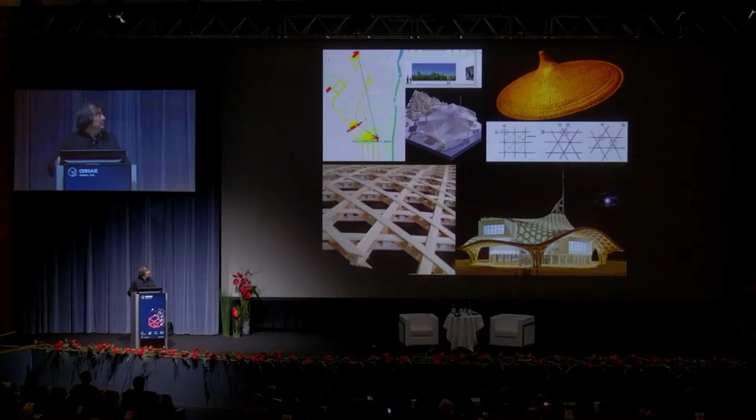This is a map of the city. This is the train station, and our site was the south part of the train station, which was totally empty. The center of the city was the north part, with a very famous cathedral.

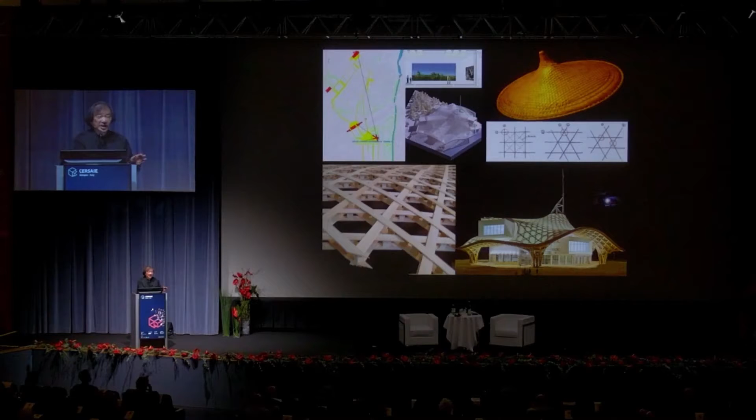This is the model I submitted. There are 3 so-called gallery tubes, 15 meters wide and 90 meters long, stacking on top of each other.

At each end of the gallery there is a big window called a picture window, framing a view. For example, the top of the tube frames the very important cathedral, and the second tube frames the train station.

Because the city of Metz is on the east side, near Germany, after the war the city was always occupied by Germans. There are so many important historical German buildings, including this train station, so the second tube frames it as part of the history.

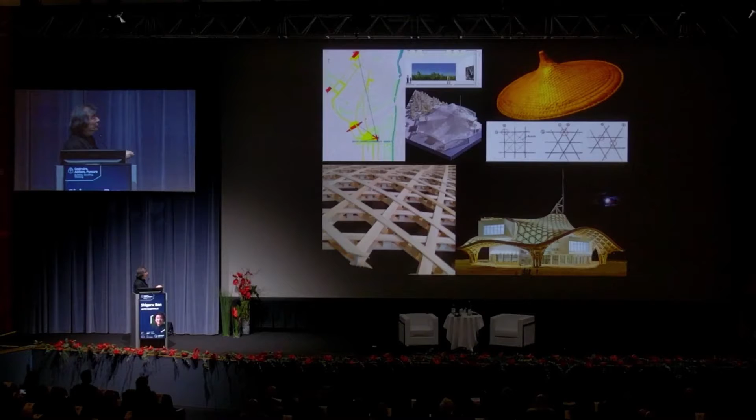The roof idea comes from the traditional Chinese bamboo hat. When I had to decide the geometry to make this structure, I studied 3 ways.

For example, if I divide with a square, because a square changes shape, we need bracing, and the connection becomes very complicated.

If I divide by triangle, it's the most stable shape with no bracing, but there are always 3 elements meeting at the connections. The third option is hexagon, which came from the bamboo hat.

As you see, the hexagon doesn't have in-plane stiffness, but because of the triangle, without any bracing this is a very stable shape. Also, at each connection you can see only 2 elements meeting, so the joint is very simple.

So this is a model. And because this is a tensile structure, I overlapped each element in order to avoid complicated connections.

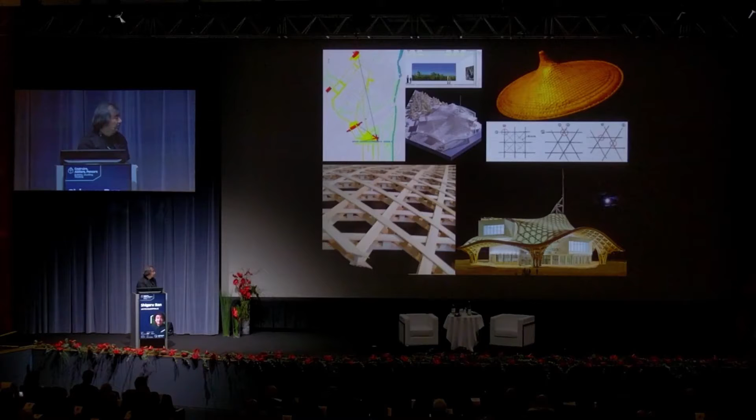Next, please. This is the completion. Just before the opening hour, the glass shutter is closed and people are waiting outside.

This is a picture window. Next, please. Next, please. So you can see this is a picture window.

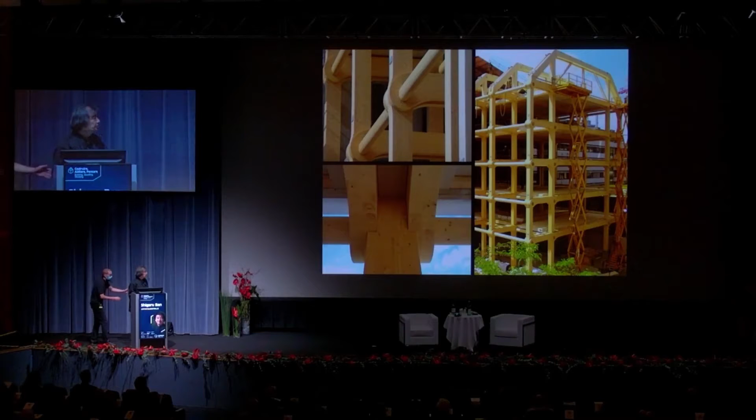Next, please. Thank you, yes, thank you. So all the structure is exposed. As you see, there are no metal connections. The glass shutter opens to create a semi-outdoor in-between space.

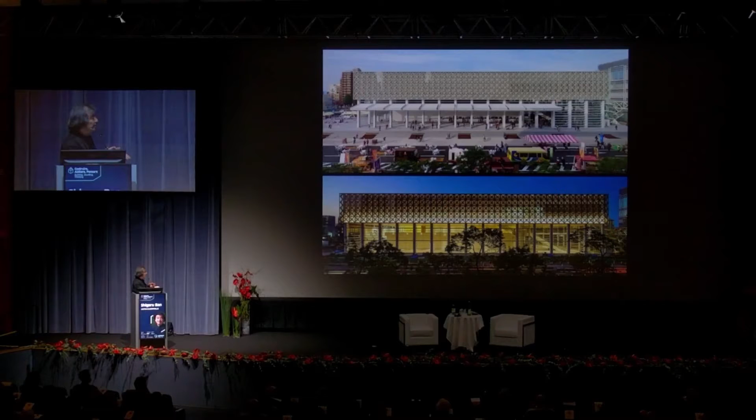Next, please. This is a museum in south Japan, and this area is very famous for bamboo craft. So I designed the upper floor structure like woven timber, and the main facade is made of glass bifolding doors. I wanted to make a museum open to the street, to connect inside and outside.

Everybody can come in from anywhere. In good weather, we don't have to depend on the air conditioning.

Next, please. So this is when the bifolding doors are open. There's another lobby on the 4th floor with a pattern of woven wooden structure like a bamboo hat.

Next, please. This is La Seine Musicale near Paris. This is an island on the Seine, used to be a Renault factory until the 90s, and the factory moved out.

The first project was the Pinault Foundation museum. Japanese architect Tadao Ando won the competition. However, as you may know, Mr. Pinault had some problems with the French government and decided to move the museum to Venice, so he canceled the project.

So then the local city decided to make a music hall instead of the museum, and I fortunately won this competition. The first thing I had to do was remove the concrete piles made by Tadao Ando.

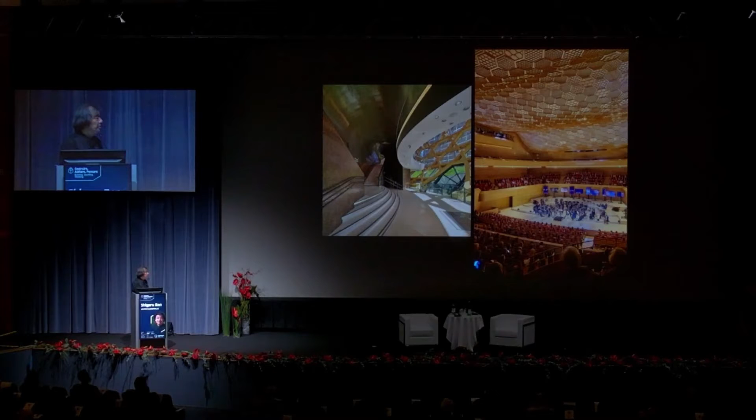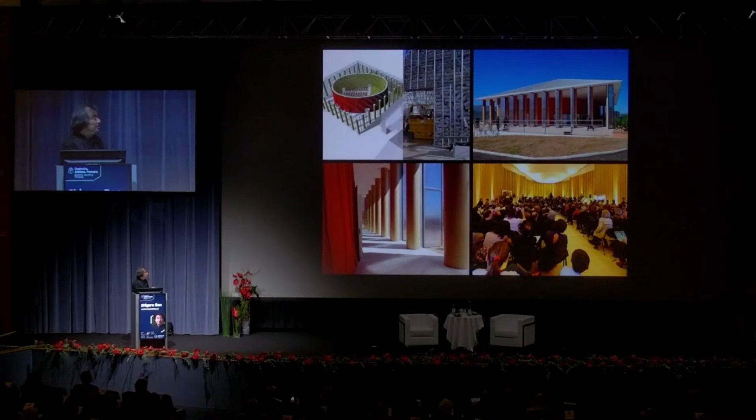2011, northern Japan: big earthquake, tsunami, nuclear problem. People had to evacuate to the gymnasium. There is no privacy. People suffer because there is no privacy. So I decided to make a partition to give privacy.

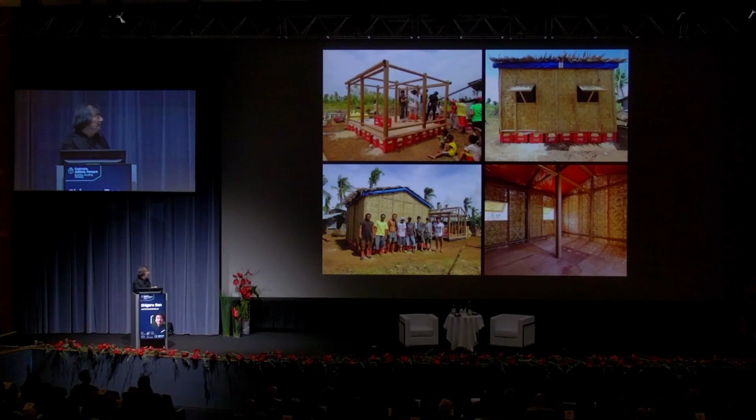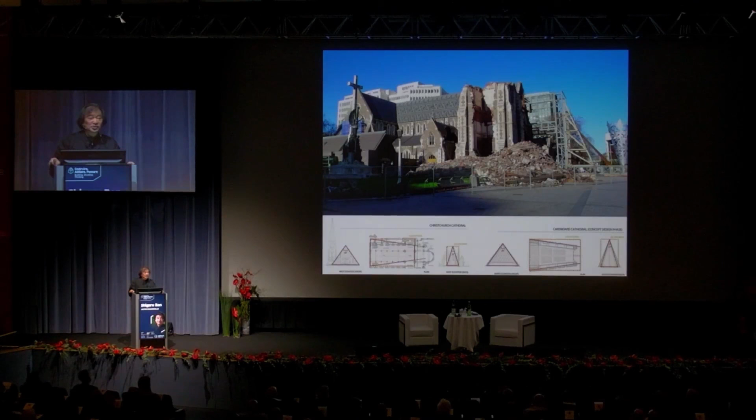This is the last project, 2011. Two weeks before the earthquake happened in Japan, there was a big earthquake in Christchurch, New Zealand. I got an email from a priest. He had read an article about a Japanese architect who designed a temporary church for free. So I said that if you are using this temporary church not only for religious service, if it's used for the public, I will design it free. So while I was working in northern Japan after the earthquake, I also commuted to New Zealand. First I analyzed this cathedral, which has many geometrical rules with a golden section. I used the same rule for the new building I designed.

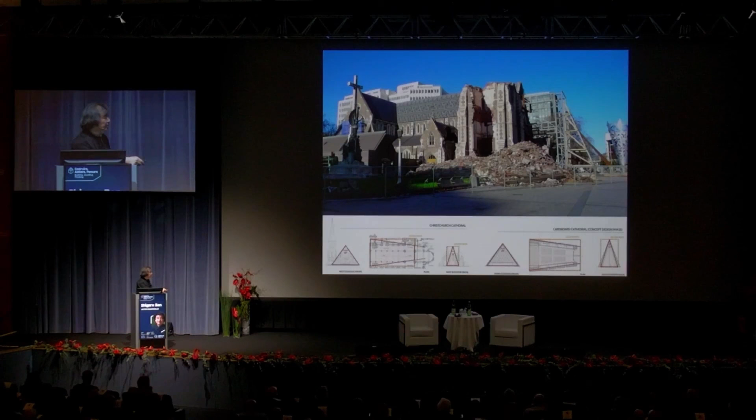This is the paper cathedral for 700 people, made with locally available paper tube. The foundation is made of shipping containers, used as an office and changing room. This became the symbol and tourist destination of Christchurch, New Zealand, and I'm sure this is going to be permanent too. So I like to continue building to be loved by people.